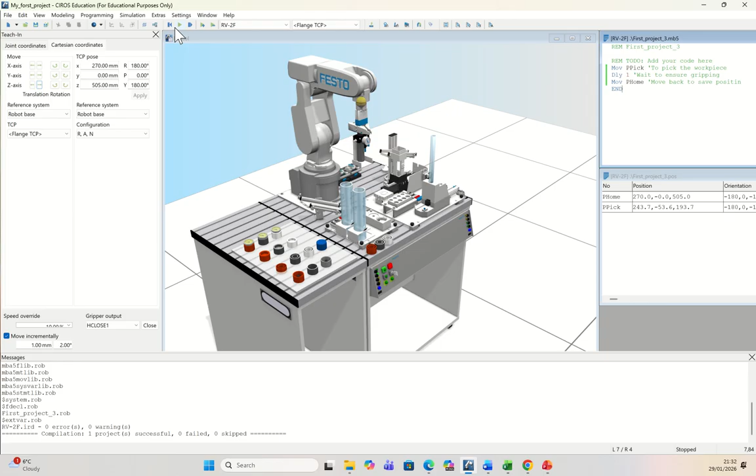What I'm going to do next is I will try as much as possible to pick an object, to pick a workpiece, and to do that, I would set it. I will try to set it.

Okay, cool. Now, what I'm going to do is I am going to delete this. I will delete the pick position.

That was what actually was giving a little bit of problem there. What I will do is just compile. I will compile it. I will just delete that one.

Or even delete the entire program, or let it stay as is. I'll delete the entire program here.

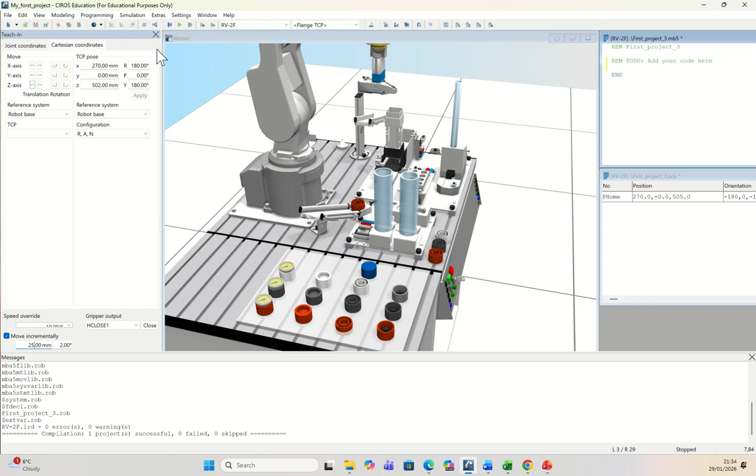So what I'm going to do actually is I'm going to bring this. I will try and use the Z axis to bring the machine down. But I'll first of all change the incremental movement to 25 because I want it to be a little bit quicker. Good. So once I'm there, I'm going to change it to 1 millimeter, which is fine for me.

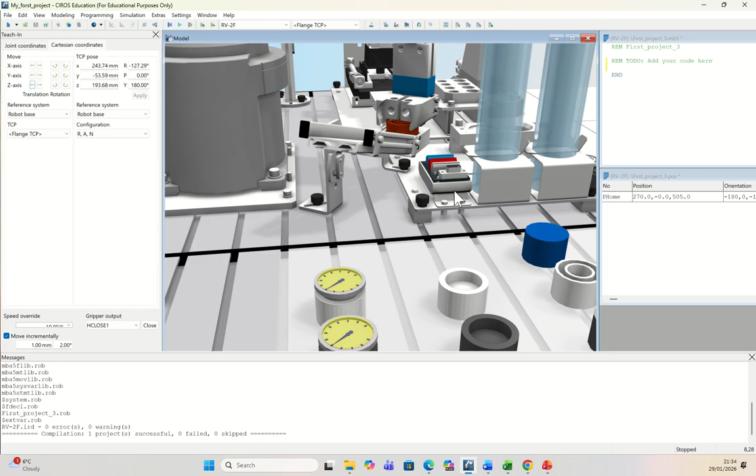And then I will rotate it and enlarge it a bit. What I want to do is get a good view of this and be able to grip it. So this is fine for me.

What I'm going to do is go to the joint and, okay, let me stay here and see if... no, that is not good for me. So I'll go to the joint and use the waist to move it a bit.

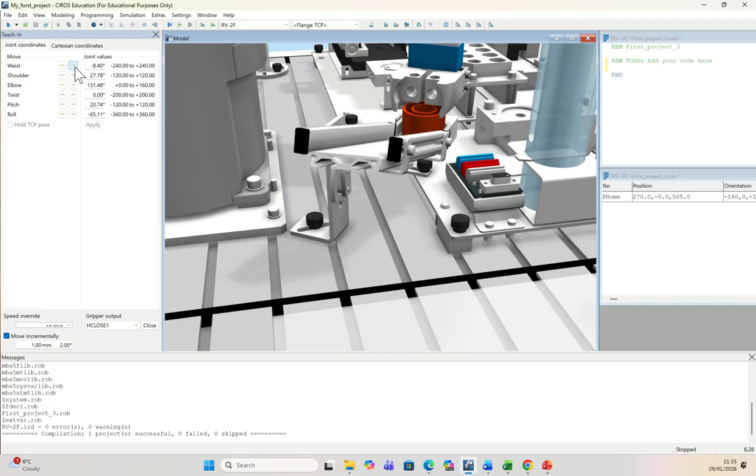What I'm trying to do is give myself enough room for this workpiece. And I think if I come forward a little bit, that is fine. That movement was too much. Maybe I will change it to 1 degree, and if possible, even 0.5.

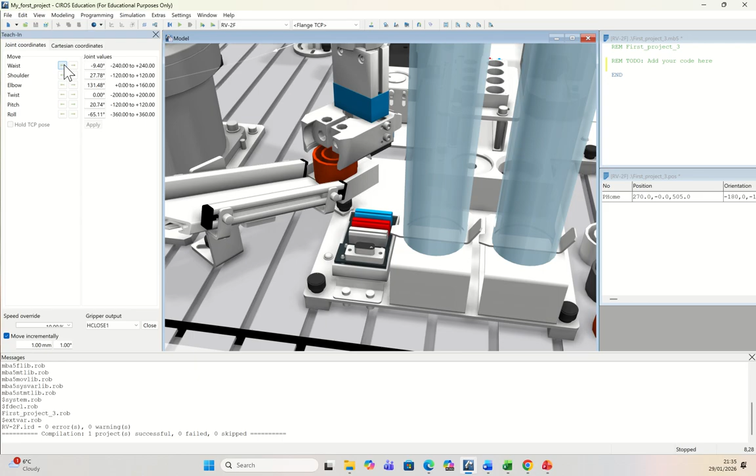So I will see if this is okay. Okay. I can turn it, I can rotate it, and see if I have enough space around it. Not enough space.

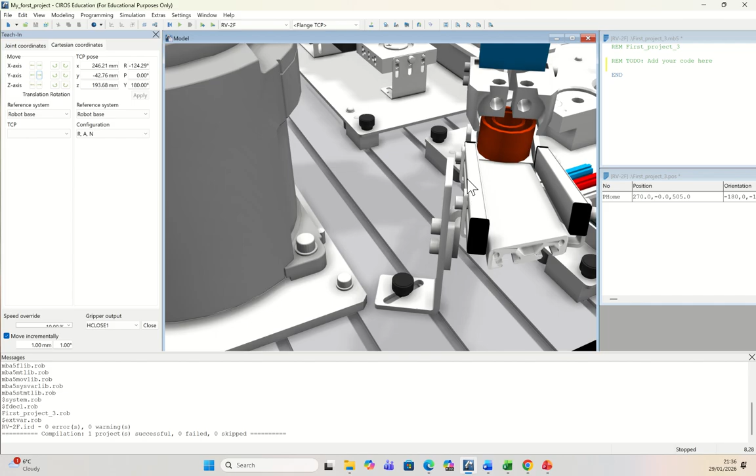What I don't want is that if I'm trying to grip this object, I don't want to cut into it. So what I will do is come here, use the Y, and give myself enough space. Just want to, this is slightly the hardest part.

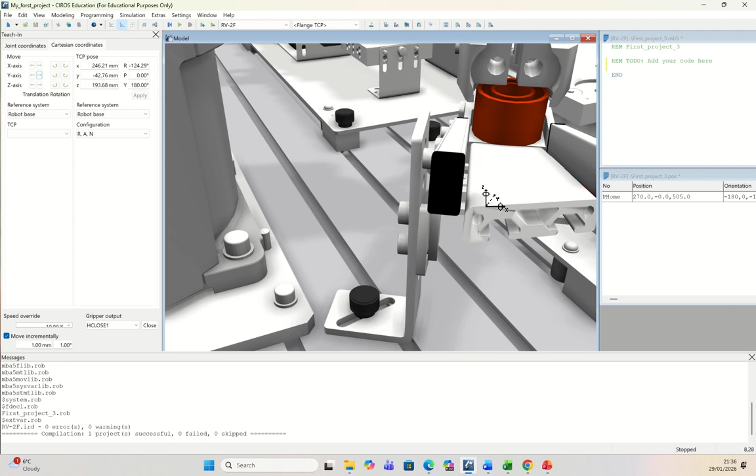So I want to see if I've got enough space around it. What I will do is first of all, and then maybe I will now come here. You see here the gripper output, it's showing H close.

Yeah, and this robot has one hand, so I will only have H close one. And what I'm going to do is close the gripper to see if it's going to grip this object. So I'll close it. Not really, but I will try.

I'll give myself a goal to see. I will lift in the vertical direction to see. It didn't lift it. So I'll go back here and maybe move a little bit back, and I'll come back here and use the...

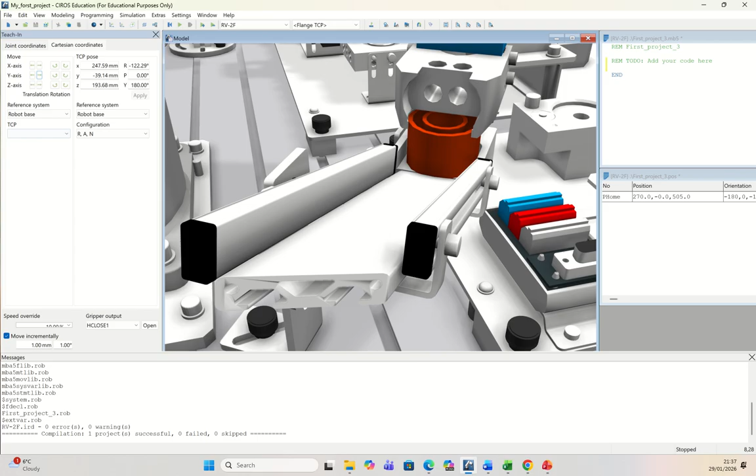Okay, now what I'm going to do is open the gripper and turn this a little bit to see. Maybe it's so a bit inwards. It's gone a bit inwards, so I can, but I'll close it again and see, and try to lift and see. It didn't lift.

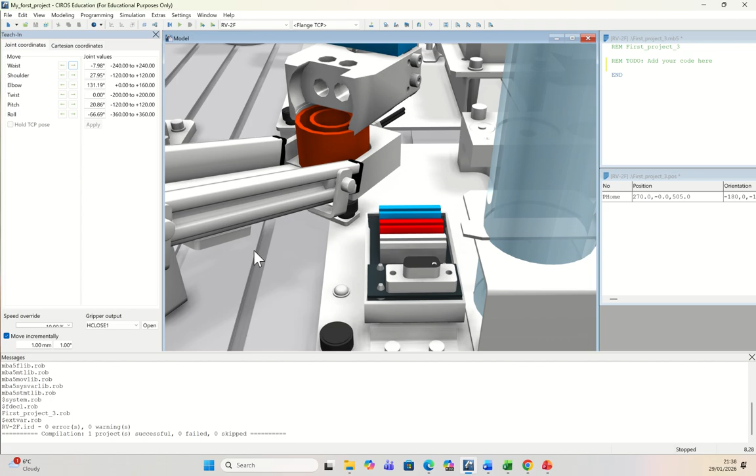So what I can do is go a little bit... good. And gripping, what you don't want to see is the gripper cutting through the workpiece. It's not going to lift it if it cuts through the workpiece. So I will use this, and I will open and close again and see, and move in the Y direction. Now it's gripped it. Can you see the movement?

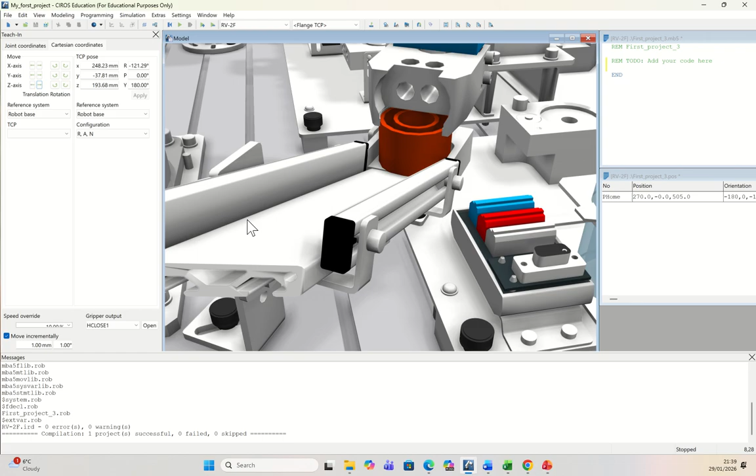I'll lift it. Can you see it's being lifted? I will come back and drop it where it was. So now I've gripped it. It's good, I love it.

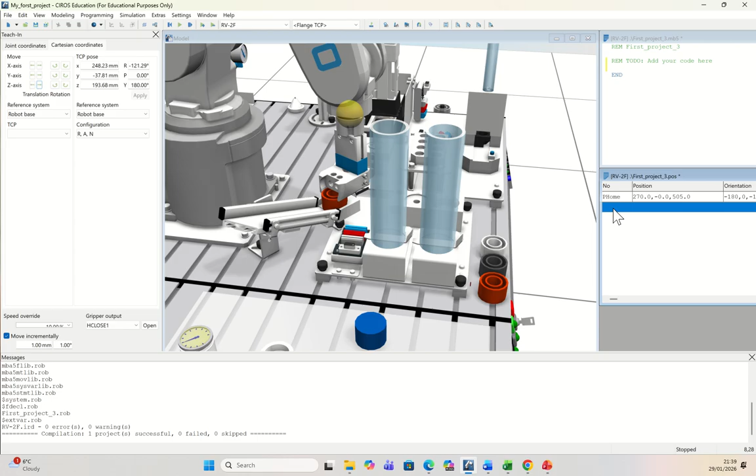Yes, I've gripped it. So what I'm going to do is tell this machine, the robot, that this is another position I want it to be. I will go here, right click, select this. Once you select a space it turns blue, right click in it and insert a position, right click again and go to properties, and I'm going to write workpiece, P workpiece.

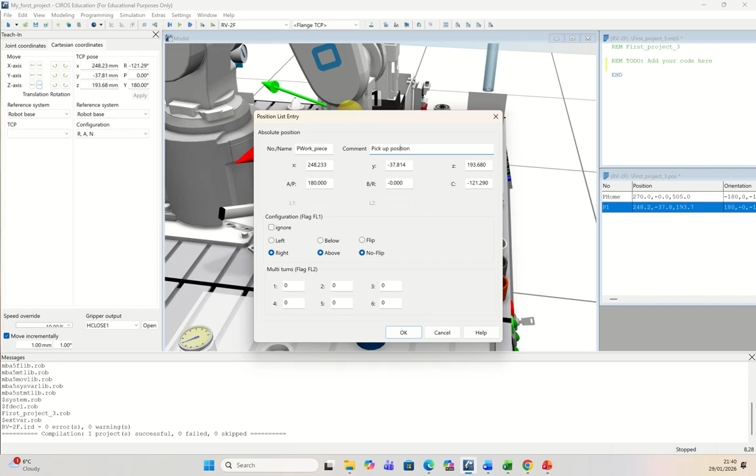And what I will do is say pick up, pick up position. I will close this. This is fine for me. I'm not going to waste so much time.

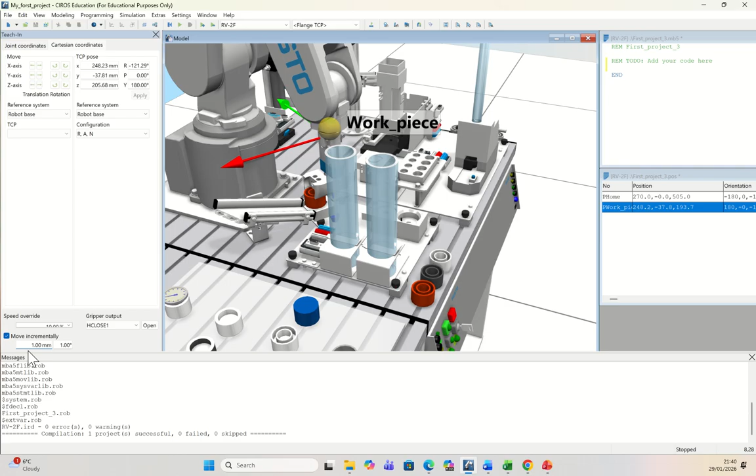What if I need to move this to another position, to another place, for example, to here? What I will do is let the gripper hold it and lift it up. So let me lift it up. Maybe I will increase the movement to 10 so I can move a little bit fast. I will grip it up, and then go to the joint and rotate it.

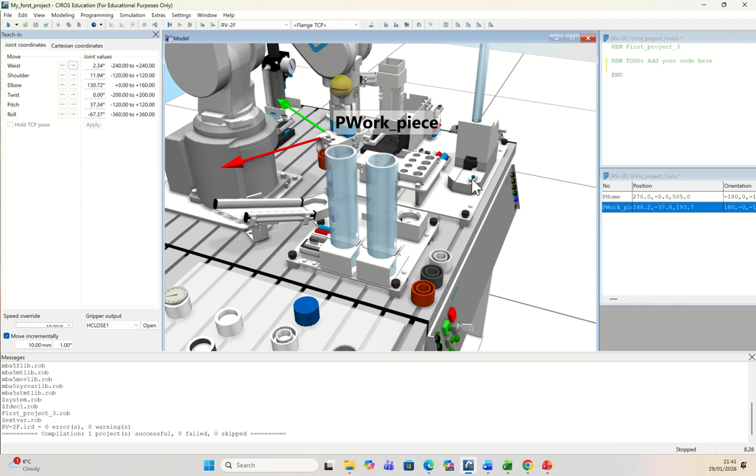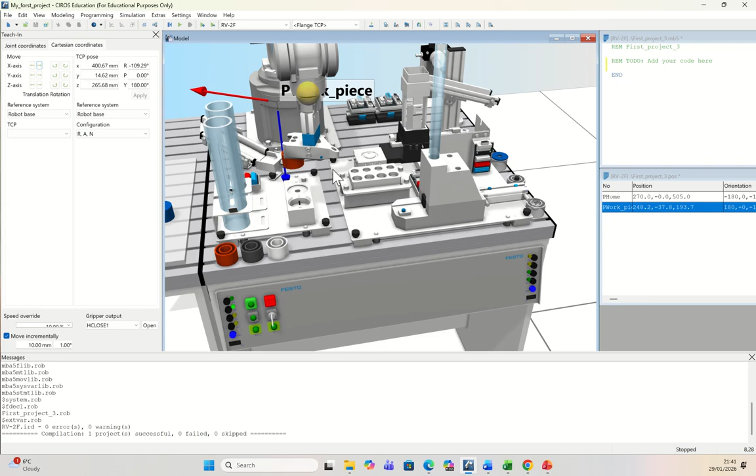Let me rotate this object and see where I am. I guess I can do a little bit more, and then I'll come here and use the Z—sorry, the X. I will turn it a little bit and see where I am. I think I've gone too far.

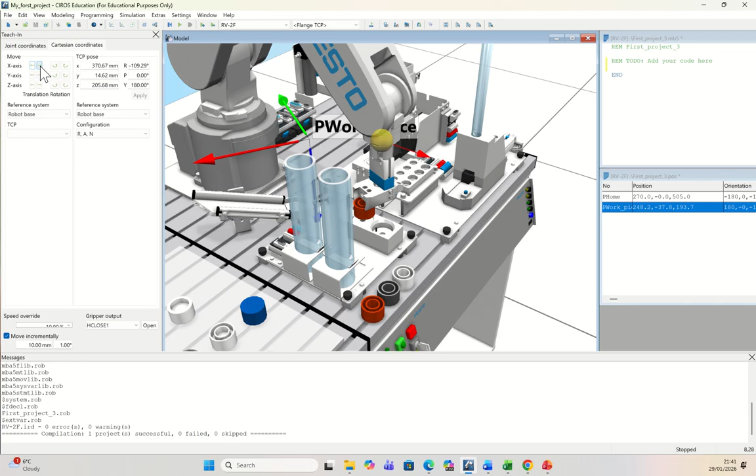Sometimes if you don't rotate... and then I will come to the Z position. I'll go to the X, maybe a little bit, and go to Y, and rotate and see if I'm there. I'm not really there. I will go to Z.

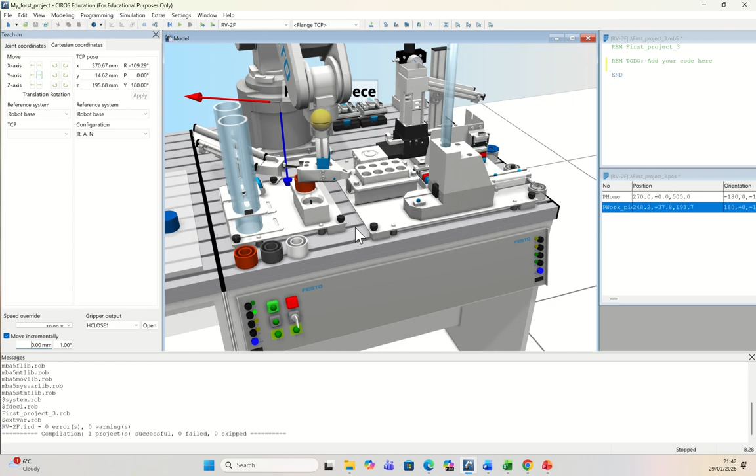I will change this quickly to maybe 2 or 1 millimeters. 1 millimeter. I will rotate it this way and see. Let me see. Oh sorry, I made a mistake, where I put the 1 was wrong. Let me put 0 here, and let me put 1 here so I can move in the X direction.

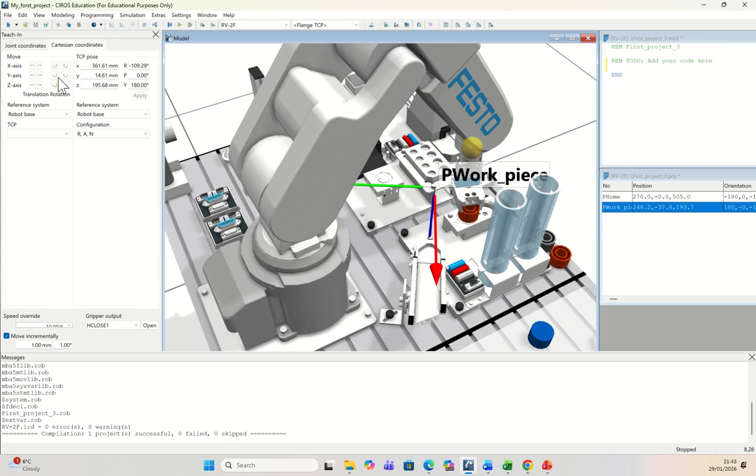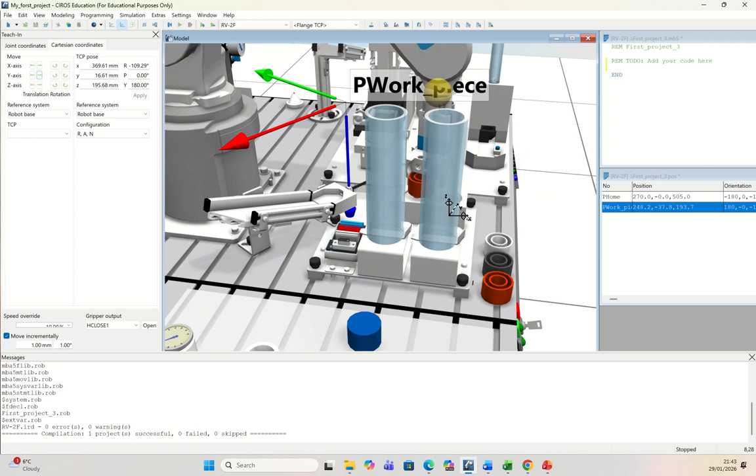And then let me rotate once more, and make it slightly bigger. I guess I have to rotate, and I guess I have to move in the X direction, and I guess I've gone way beyond sometimes.

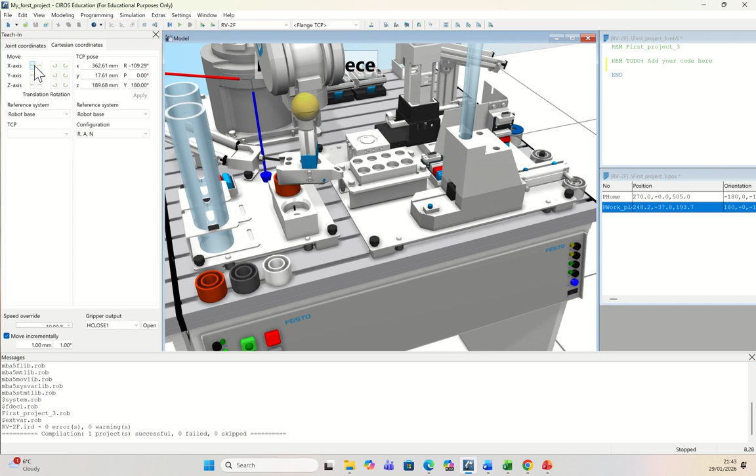What I'm going to do is drop it, and dropping it will help me be a little bit quick. I guess you're not going to say—if it was a real object, I might have broken it. So I guess we are almost there.

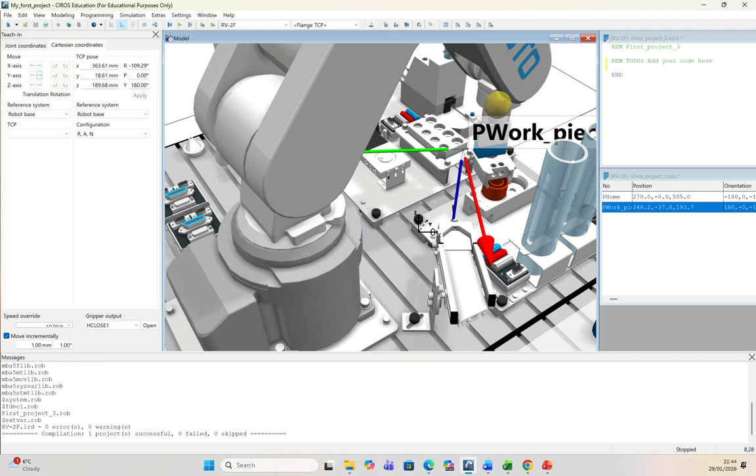Let me go to a little bit here. So I will drop it. I guess it's fine, I will drop it, I will drop it. And sometimes you can zoom it and see if really you are there.

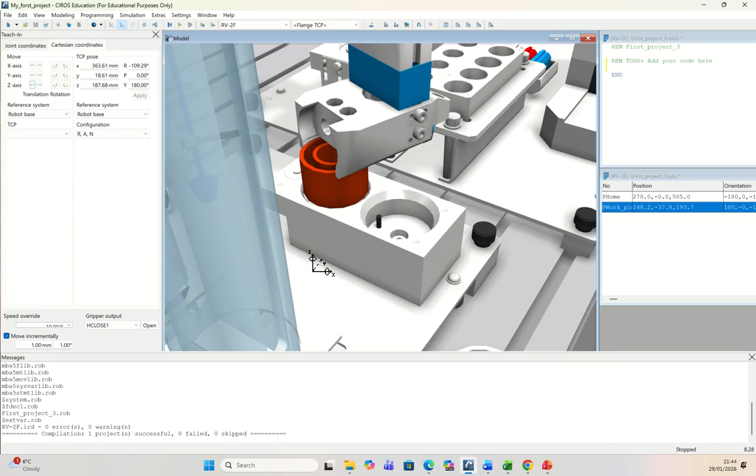It looks okay, it looks okay. So this is a third position, and I will right click here, and I'll right click again and say drop. Let me just leave it like that.

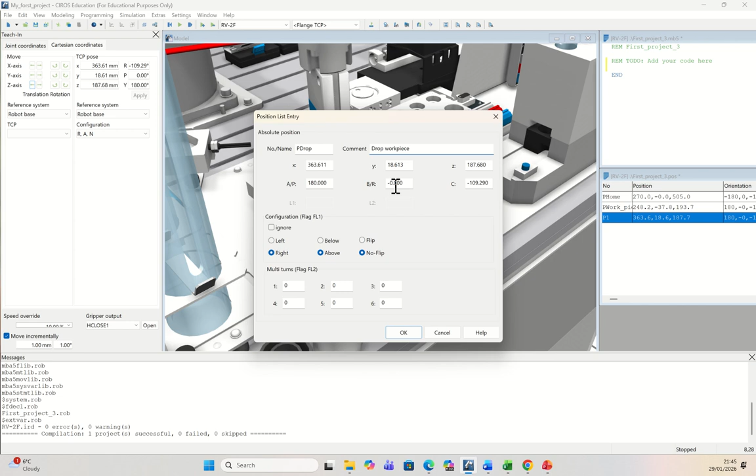And I guess that is fine. So I've got 3 positions. So what I'm going to do now, as a quick one, is—I've taught this, what is it called—I've taught it what to do, but this is very basic.

There are a lot of things I have to put into it, but maybe in my next video I'll do that. So I'm going to reset it, and then I will just quickly come here and write the program.

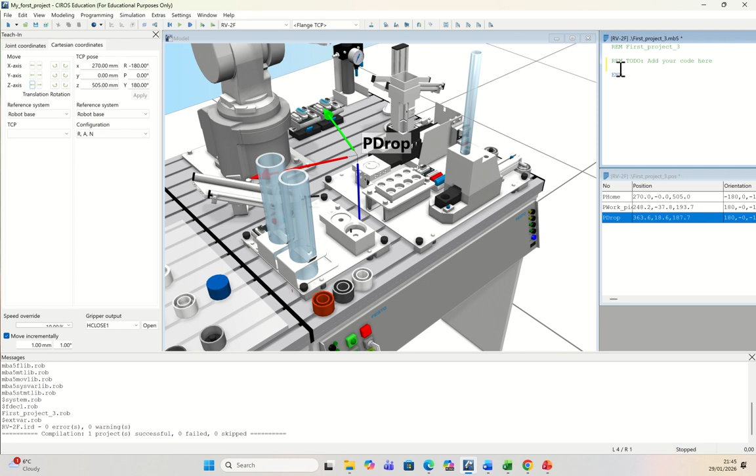So writing the program, what I'm going to do is say move P pick. Sorry, yeah, move... I didn't, yeah, P workpiece, workpiece. And then—I made a mistake, anyway it's fine.

I should have opened the gripper. I didn't do that, I didn't open the gripper. So well, it's okay, it's fine. So let's go to P pick.

And then we will say H close, meaning we want the gripper to close. H close 1—the 1 I put after close, we have to identify the reason: it means I'm using gripper number 1. There could be so many grippers, 1, 2, 3, and so on. Then I will ask it to delay for maybe 1 second, and then I will go to move, and ask it to go to move P drop.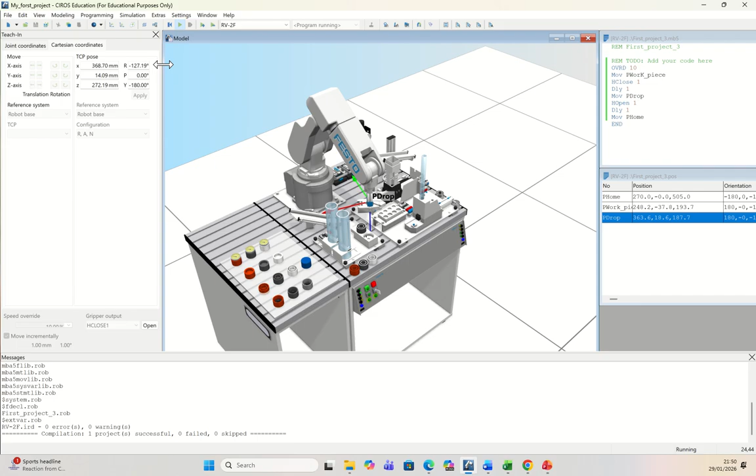That's it, so this is some of the things you can do. There was confusion, sometimes the robot will move before the object appears. If you know the sensors, you can program the robot such that it wouldn't move until there is a workpiece there waiting for it. So maybe in my next video I can do that.

But for now, what I would say is that there are a lot that we can put into this. We can put other things. We can ask the robot to move up to a certain point and then move straight. Let me just add that one quickly. So what I can do is that I can say to the robot that move.

Sorry, I want to copy this. So I will copy, Control C, and I will put it here. I'll put this here, paste it here. And what I'm going to say here is that I will tell the robot to move straight.

That is MVS, move straight, and then to PWork_piece, I'll put minus, I'll put a comma there and I'll put maybe minus 80, meaning that I want the robot to move to where it will pick the object, but it should offset itself 80 millimeters above where the pick point is.